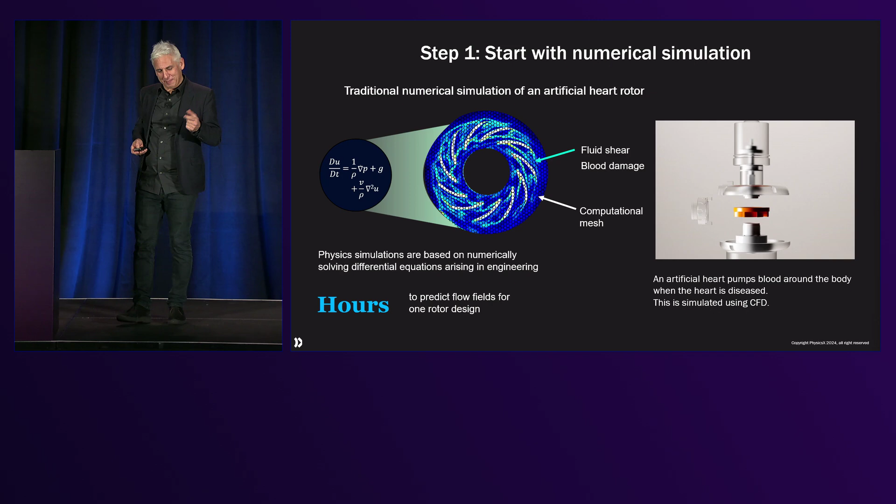So in this pump, there's a rotor. That's really at the heart of the heart pump. And that rotor has to be optimized for just those things I said. So on the left, we're coming back to now the simulation. You can see the result of a fluid dynamics simulation here, the mesh superimposed on that, and one calculates the physics, the flow, the shear, as the simulation progresses.

Now, this is the de facto way, solving problems, predicting the behaviors of designs, products, objects, by solving numerical physics is the de facto way in which leading organizations develop their products, whether it's in aerospace and automotive or even here in medtech. Now, the reason that is it didn't used to be. It used to be physical development.

You would build test cars and you would crash them into a wall to see if the occupants would survive that, crash test dummies. And then you would change the design, would make a new prototype car with new prototype parts and crash it into the wall again. It takes a lot of time and it's expensive. Destroying an expensive prototype car.

So simulation has replaced that. Virtual crash simulation, now every auto manufacturer does that. This is how they develop the product to be faster. It doesn't cost anything except compute to smash the virtual car into the wall. And it's fast, right? So this was a quantum leap in performance in advanced industries to replace physical testing with virtual testing. And you can do that in most contexts, not always, but in most.

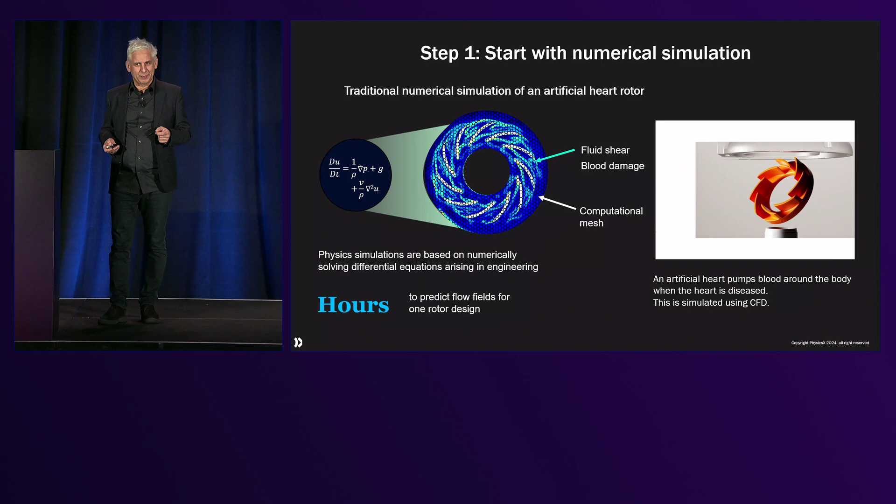And the answer is yes. We can build this, and in fact, to high accuracy. The reason it's high accuracy is because this is labeled data. This is highly accurate data already. All of that simulation data, all of that information on the meshes, all those flow fields, pressure fields, and all of that. These are highly validated simulations. Therefore, the data is labeled, and it's very high quality. So the models we can train are high-quality models.

And the benefit is, though, the deep learning model is much, much faster. That heart pump simulation takes about 1.4 hours. And in some contexts, simulations are over a week per simulation long. So typically hours to days is a normal time to run one simulation. So can we go faster? Well, deep learning models, yes. It's not partial differential equations, it's linear algebra. Everybody knows they run in under a second.

So when you can run the equivalent of a simulation that fast, you have the opportunity to optimize. You can change the design, run the model, inference, predict the physics, re-optimize the geometry, and you can do that very, very fast. And you can do that inexpensively. Simulations have to run on hundreds or thousands of CPUs for a long time. These models inference on a single large GPU like an A100. And even if you need more, you can split the graphs and all of that, but typically a single GPU will allow you to inference.

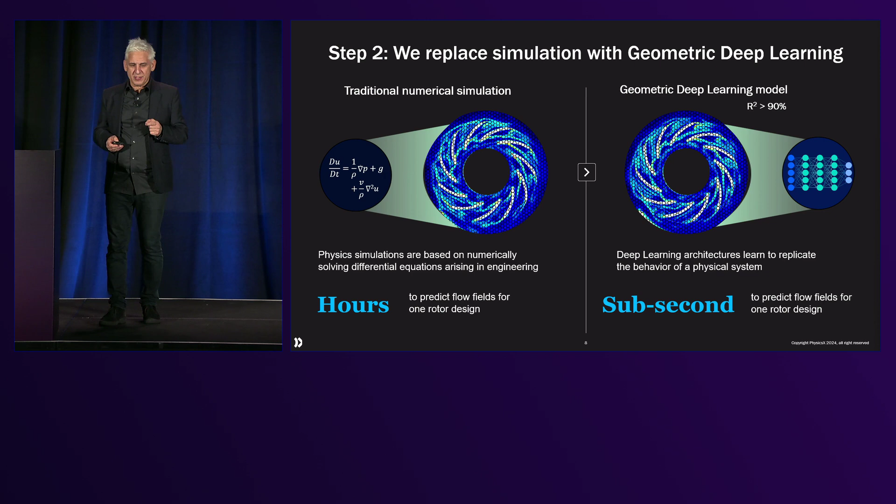So how do you train a large physics model? On the left-hand side of this image, it's a typical legacy process here. You run a CAE simulation. CAE is computer-aided engineering, so that can be CFD, computational fluid dynamics, or FEA, finite element analysis, or electromagnetic simulation, CEM. You run the simulation on the object, on the first geometry of that object, and you get a result.

And then, okay, it's not good enough, so you optimize the geometry. You can do that by hand, or you do it programmatically, and you run this loop. And that generates data until, in the legacy process, you get somewhere that is acceptable. But in this, you might have to run 50 simulations or so to get to your target, because that's all you have time for in the few months that you have to develop this product. But in the process of that, you generate training data.

The training data, the input, again, is the geometry, the mesh, and some of the operating conditions like pressure difference. And the output is the physics, the pressure fields, the scalars, lift, drag, strain.

Okay, great. As I said earlier, we built our own foundation models. They're on our platform. Our models are available. There's a handful of different types of archetypes that are relevant for different contexts. But you can bring your own models to our platform. You can use models from Modulus if you want to, third-party models. Everything plays. You train the model, adjusting hyperparameters and so on until your correlation is acceptable.

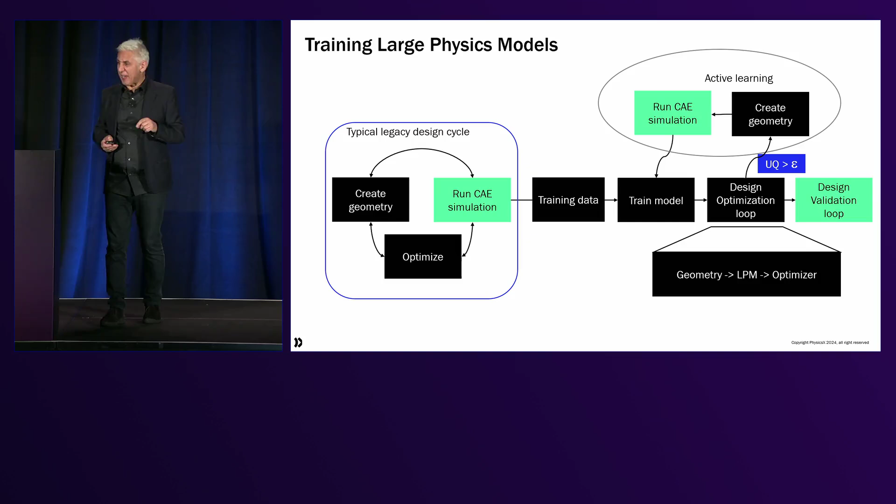Okay. So let's see that in action, what happens when we have a trained model and we run it through geometry creation, model inference, and optimization. So here's that rotor for the heart pump again. You can see we generate the geometry. This runs real time on one A100. Generate the geometry. The physics model evaluates it. An optimizer changes the geometry again based on the result. And each iteration is one of those loops. It's about an iteration a second.

On the left-hand side is delta P, it's pressure. And so as you increase the pressure difference, it just means the pump flows more. We're looking at one parameter here, but it's actually multi-parameter optimization. Blood damage is kept track of. There's additional physics happening here that you're not seeing, like thrust on the bearings and things like that. That is estimated just to make sure we don't exceed any of those thresholds.

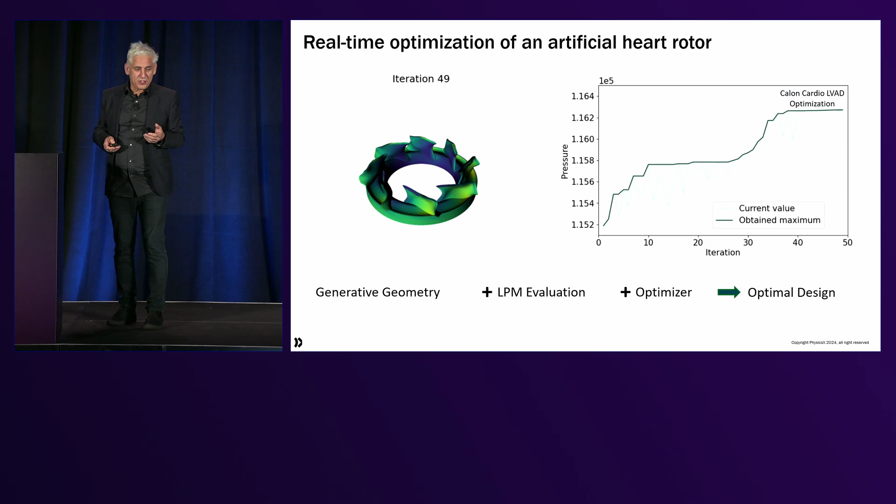So in about the minute that I've been talking, we've made, what does that look like? Maybe a couple percent delta P improvement. Yeah. That's not bad, maybe a little over 1%. So, you keep going like that, you will eventually reach some tangential state, but you will have done 100,000 simulations or optimizations in a day and really extracted the maximum performance out of this pump that is possible within the space that you have available.

So if we put this all together, again, the loop, geometry creation, and let's dive a little bit more into how we generate geometry. Computer-aided engineering, parameterizations, computer-aided design, CAD, is the de facto way, the normal way that designs are done. Engineers specify all the curvatures and the distances between objects and all of that. Takes a long time to do that. You can mesh that part then, and you get a mesh, as you saw earlier, and you can distort this mesh. So that's a capability that we've built of mesh distortion. It's very fast. That takes a fraction of a second to distort the mesh.

There are generative models. Not only us, other people do generative models, topology optimizers, and things like that. That's one way to generate geometry. But then there's a special way, and we'll get to that a little bit later on large geometry models, and I won't say more of that until I get there. As I said, we have deep foundation models that we train, and once they are trained to generalize well, these large physics models then can predict the physics. And then in optimization, there's classes of optimizers that we provide on the platform, Bayesian optimization, gradient descent, genetic algorithms.

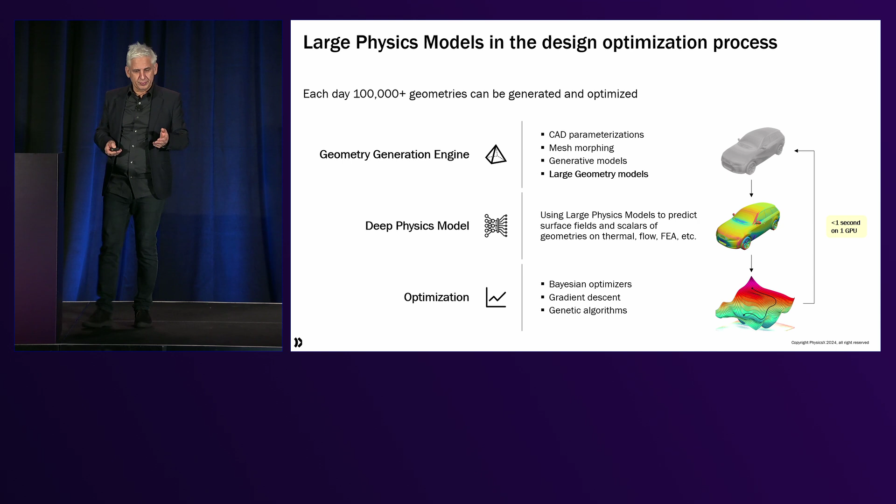So let's talk about the platform a little bit. The PhysicsX platform is founded on a data unification layer. The data that is relevant is simulation data, but also laboratory testing data. I will show you an example of that in a moment. And operational data, so data coming from machines that are operating on the floor of a factory or from objects like helicopters that are flying.

On top of that sit the solutions. And those solutions are really relevant for the sectors that you work in, so aerospace or automotive. It's often around shape optimization. There are solutions around, for example, structural optimization, system optimization, so several simulation tools linked in a chain that you want to optimize. We can do that. We have done that. Our customers are using that. The operations team, I said earlier, factory flow, I'll have an example dive into that.

And even sales engineers are using these tools because they can very quickly predict the performance of, let's say, a hydroturbine or a wind turbine in the field under those local conditions under which they're trying to sell it. And that means they can sell a little bit more energy at lower risk.

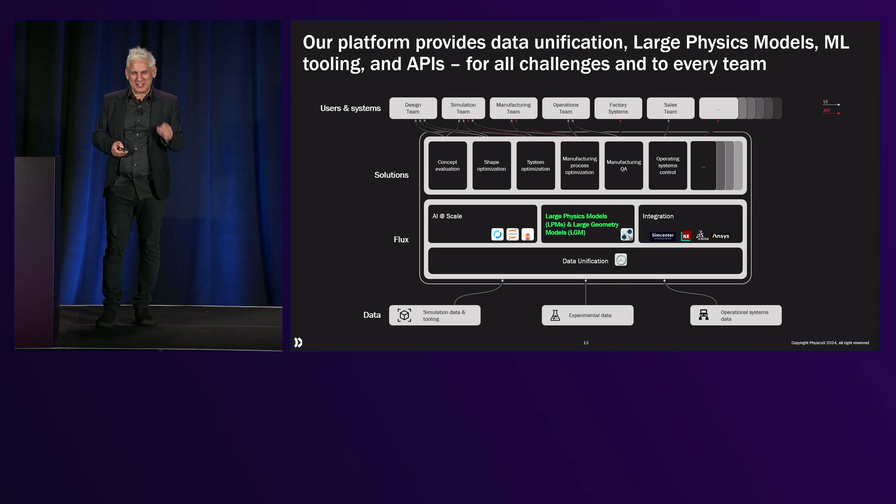So let's now solve something on the platform. We'll demo the platform to you. And let's pick something difficult, because we like difficult, hard challenges. Let's pick a jet engine. So, jet engines are complex, and I don't understand them all. So, they're complex objects. And they're also very complex to simulate. I'm oversimplifying a little bit. I'm just looking at one thing on this jet engine in particular.

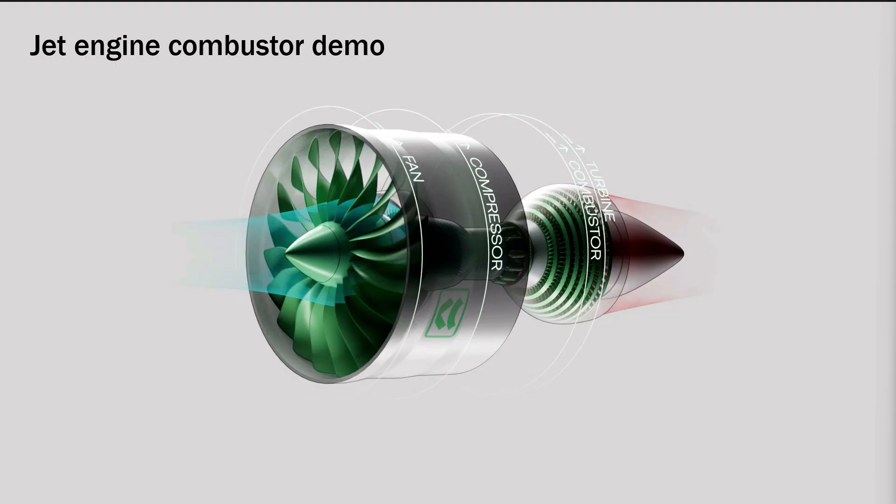So let's dive into this jet engine, literally. The airflow is sucked in by the fan. It's then compressed on the compressor stage. And then these little bottles are the combustors, and they mix fuel and that compressed air and burn it. And then it exits into the turbine stage at the end, and the expanding air causes the turbine to spin and produce the thrust. So we're just going to look now at the combustor.

So it's a canister with holes. At the entrance, you can't see it, it's got mixing blades, stationary blades that mix the fuel and the air, and they've got complex shapes. And the can, what's the shape of the can like? There's a lot to optimize around there, lots of holes in them. So a lot of parameters to optimize.

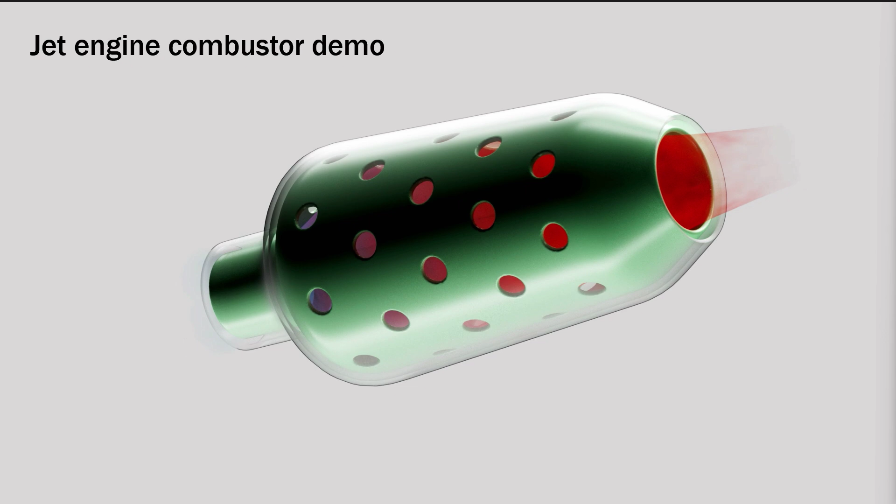And it's multi-physics, right? We've got airflow, we've got thermal physics, we've got chemistry, we're combusting stuff, right? So there's chemical reaction equations that have to be solved. There are material properties that have to be obeyed, constraints, temperature limits, things like that for material properties, for stress and strain and thermal fatigue. So this is complex. How can AI possibly solve this?

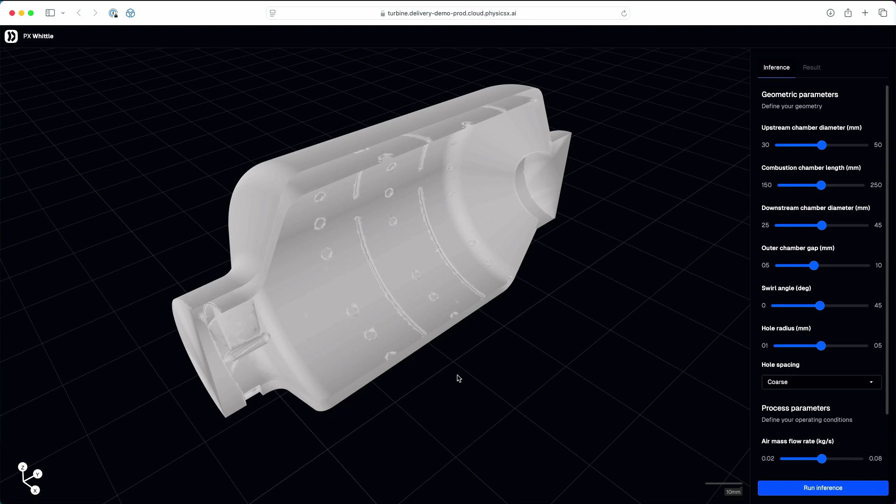Okay, so now we're in the interface of our platform. Here's the starting geometry of that combustor. On the right-hand side are the geometrical parameters you can vary. This is how this has been set up. So there's, I don't know, 8 or 9 of them that can be varied. And let's see how this is done, right? Let's change a couple of these geometries on the right-hand side.

So adjusting, can't see it from here. Adjusting a few, hit run, and there, less than a second, this is the result. Now this is real physics. These are the real performance parameters. There's low efficiency of 0.3, high temperatures everywhere. Clearly not a good design. So let's re-optimize here, just changing, making it a bit longer.

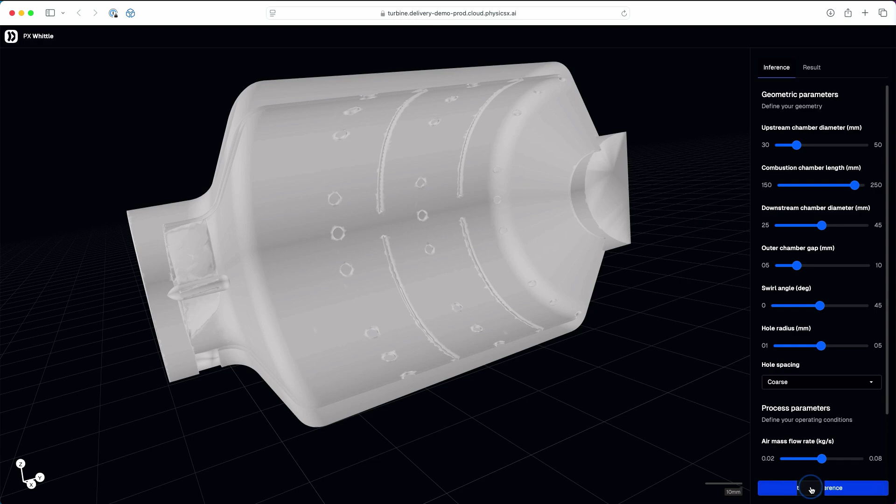Hit inference again. Okay, a little bit better, 0.4, not great. Temperature's a bit more under control on the exit now. Now, I could go through this manually, but that takes a long time. How can we do that programmatically? Can we do this hands-off? Absolutely. Let's have the part optimized by itself.

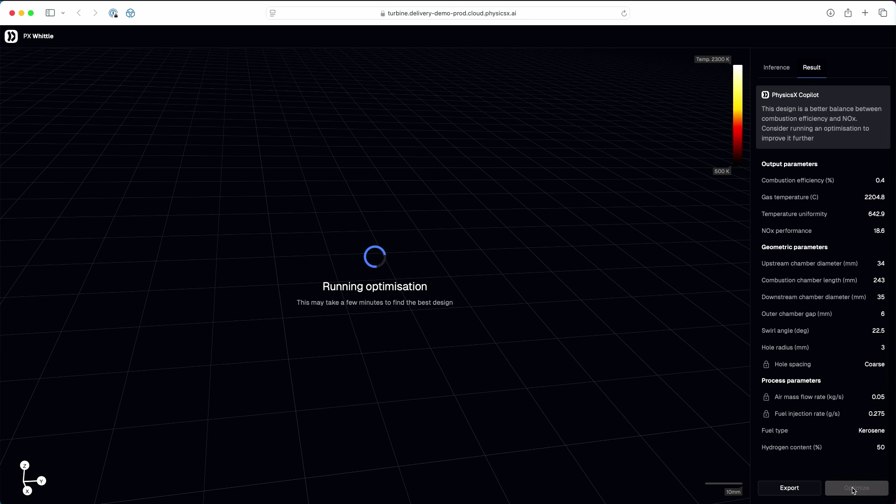So now in the background, this process that I described earlier is running: geometry creation, large physics model inference, optimization, looping this, and while I'm talking, there's only time for, I don't know, a couple dozen or so runs. So these are the results. On the bottom axis, you have efficiency, so essentially power produced. On the vertical axis, you have emissions, and lower is better.

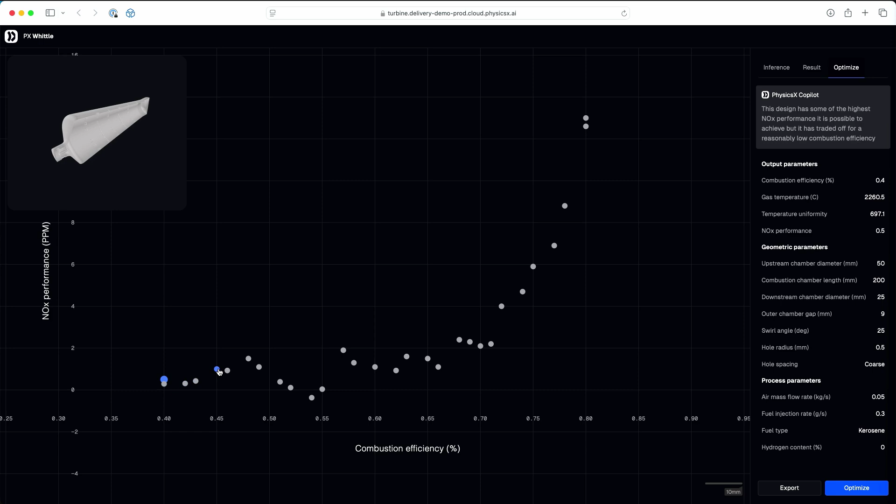So on the left-hand side here is a very low emission point. Each point is a geometry. It's a full solution. You can see the solution there in the top left corner. And let's pick one in the knee of the curve that makes sense. It's still low emissions, but has high efficiency. And if I look at the efficiency number, it's 0.7.

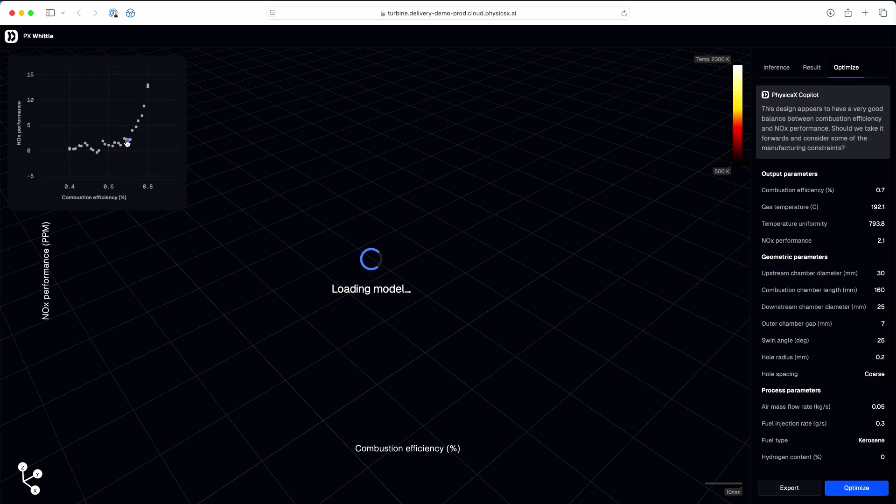Let's load that model. You can see it looks very different. Much longer, skinnier. Hole locations are different. You can see the turbulators of the blades, whatever those have shown up now to be. But you can see the whole flow field is much, much better. The temperatures are very contained. Everything is burned, right? There's no more burning near the exit, so efficiency is high.

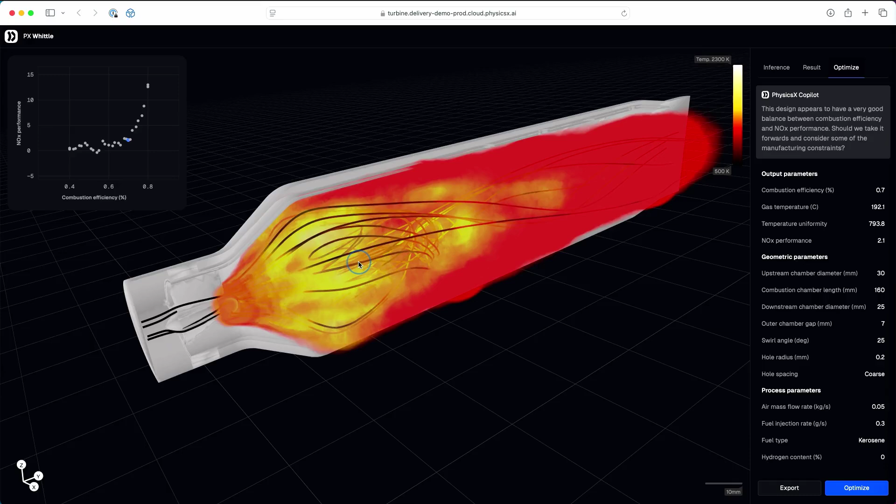So in a matter of a couple minutes or so, maybe a minute, we got to somewhere that with the legacy simulation would have taken us weeks. And we can go more and see if this Pareto front, this curve, even pushes us into yet a better direction. So what this means is that we can take the time-consuming process of numerical simulation, compress it greatly, and optimize designs much better.

Now, we talked about this optimization in the context of product development. But there are other contexts in the product lifecycle that are relevant that we'll get into. So in product development, just some other examples. We have worked in things like eVTOL, Formula One cars, our background, passenger car wheels for flow and strength, wind turbines, and even nuclear fusion, which is really hard physics, but the models can learn that.

I'm going to walk you through one example, but I've got to keep an eye on time a little bit. So this is now structural simulation. There's a tire for racing cars. You're not actually seeing a real tire here. When a racing car goes around the corner, the tire deforms because it's very sticky, lots of load, the sidewall changes. And when that happens, the airflow changes. So when you want to do a CFD simulation of that car, you need to know the shape of the tire in that cornering condition.

In a corner, you want to have lots of downforce, and on the straight, low drag. Okay, so you need to know the shape of the tire. Well, it takes about 14 hours to run one of those shape simulations. Just one set of loads at the contact patch, and you get the new shape back 14 hours later. You can't iterate, right? And there are dozens and dozens of these conditions which you have to reproduce around the racetrack. So can we go faster?

Yes, we trained a model on only 35 of these finite element results. And you can see the results of the model here. Correlation of 98%. By comparison, a GP, which we trained earnestly to benchmark against, had a correlation of 59%. A shape error of no more than 1.5 millimeters across the whole shape of the tire compared to the ground truth for all of those different loading conditions. So highly accurate. A GP had 9.5 millimeters. So geometric deep learning really accelerates the ability to have accurate models.

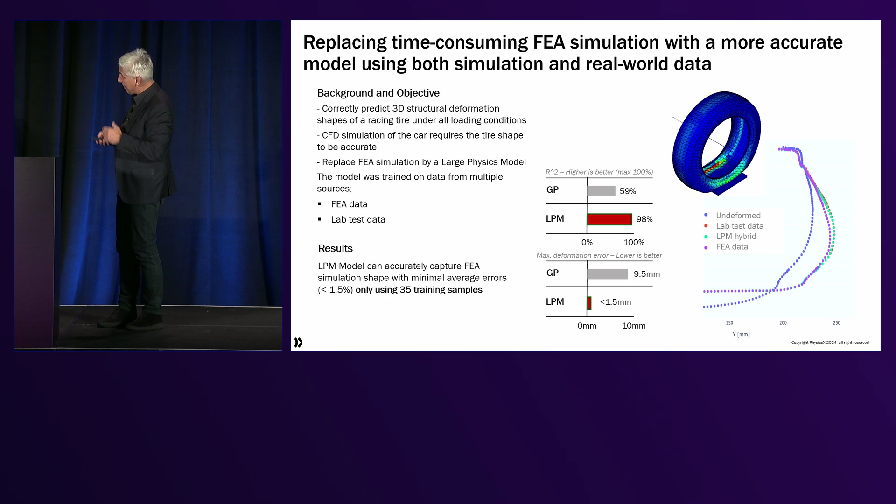But even more interestingly, there was lab test data. The shape of the sidewall was measured in a lab test where the tire was exposed to the same loads. And we trained on that as well. You can see that in the right-hand graph here. And this is not blown up. This is how much these tires distort. The blue line is the undistorted shape of the tire when it's not loaded.

Oh, I should say one thing about these tires. These are complex, right? Number one, you have rubber, viscoelastic material, nasty material. Then you have Kevlar belts in these tires. Then you've got centrifugal forces acting on them. And you have a contact patch, which you can see is flat here once it's loaded. And you have inflation pressures and temperature. So the model has to know about all of these things to give you the right answer.

So you can see the flat contact patch once it's loaded, and you can see the sidewall distortion here. The colors are difficult to see, but basically the green line here is the model prediction, and the lab test data is the red line that is literally right underneath the green line. The FE data is just a little bit to the inside, purple there.

And so you can see retraining it with the lab test data actually gave us that last bit of accuracy that we needed. And that is fantastic because these models, they train on data. You represent the data on the same mesh. The model doesn't know whether it's numerical or laboratory data.

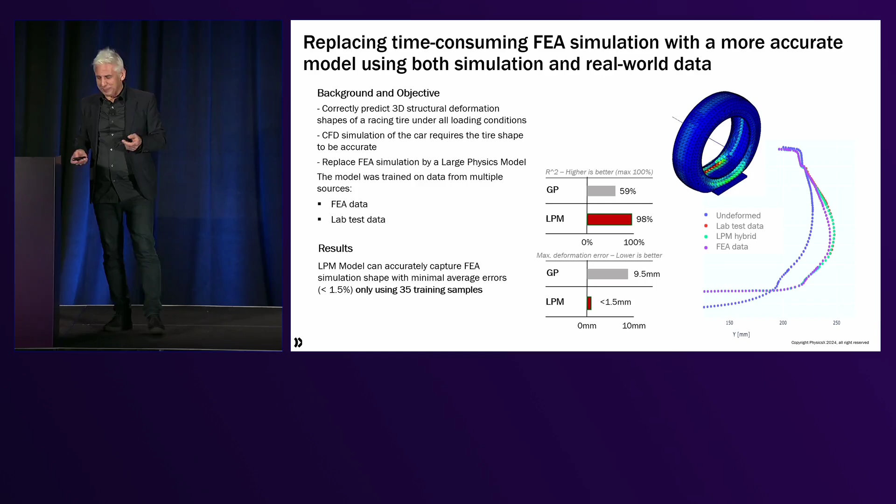I'm going to skip a little bit. I'm just going to say on this one, this is a structural optimization of a heat exchanger. A very complex heat exchanger, conformal heat exchanger, sits around an aircraft, commercial aircraft. And there it needed a complete virtual prove-out. So multi-physics, this was flow, temperature, both external air, oil, and burst simulations, burst validation, and even vibration optimization.

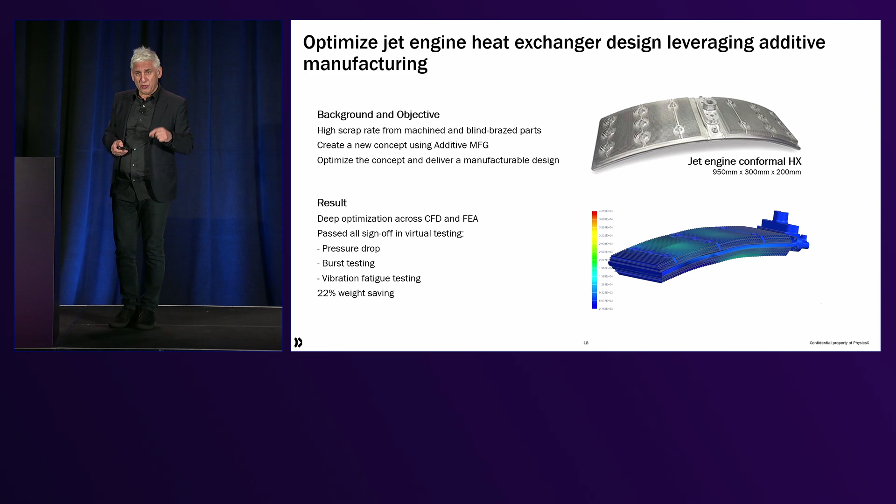So the design was taken from a standard manufacturing process of machined and brazed part to additive, where we had a lot of geometric design freedom and could really run our geometry models very, very fast. Let me go a bit quicker here. Manufacturing. This tech is very relevant in manufacturing. For example, we optimize casting. Here's an example from a jet engine QA process.

You saw earlier in the compressor stage of the jet engine, you have these blades. They have to conform to the drawing. They have to be balanced around the compressor ring. They have to produce the thrust. So each blade is dimensionally scanned, and when it falls outside the range of dimensions, the error that is allowed within the drawing, it's scrapped. But you don't really care about whether it conforms to the drawing. What you care about is whether it makes the thrust that it's supposed to make, right?

So we trained a model with our customer on this data, and the scan is done, and within a second, the operator, the technician, knows whether it conforms to a thrust requirement or not. Does it fall within that band of not too little and not too much thrust? And then if it does fall outside of the band, it's scrapped. We reduced the scrap rate by 70% doing that. They were scrapping far too many parts.

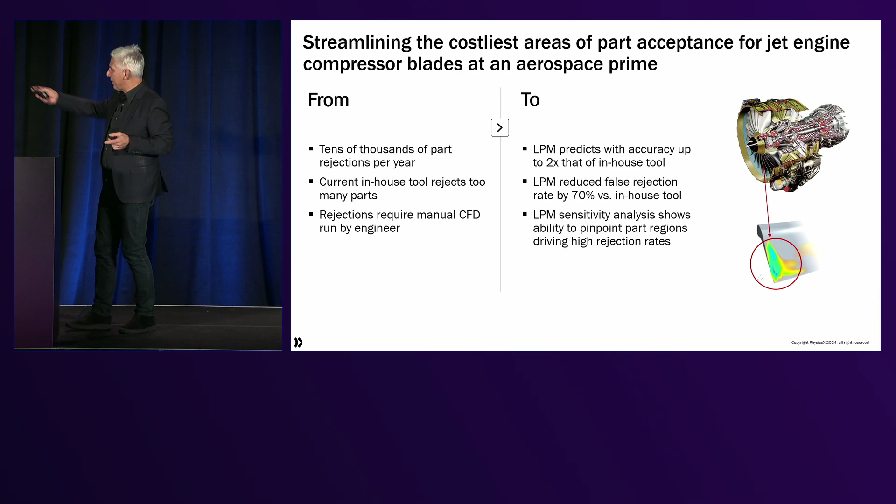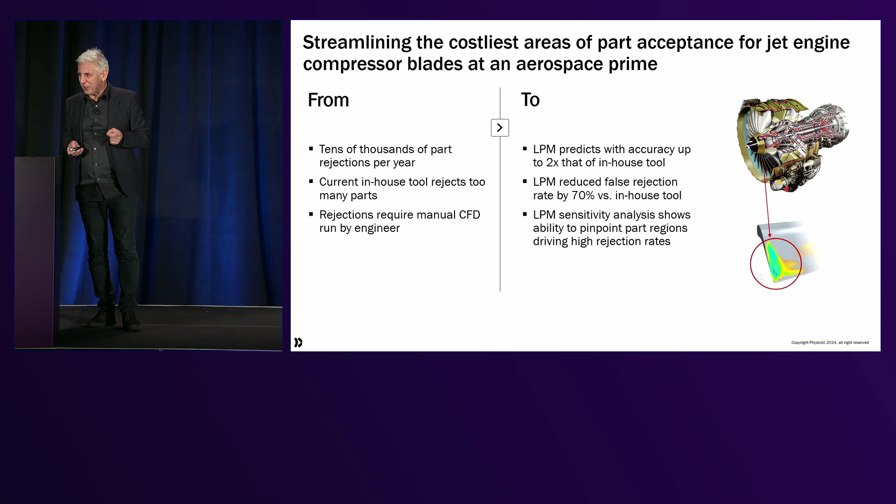Not only that, the models are differentiable, so you can find out the highest sensitivity area for performance. That's where the manufacturing process has to be accurate. And in areas where the performance isn't affected by a dimensional variable, you can relax the manufacturing process. So that's also really valuable information to feed back in.

Operational metrics. Here in particular, this is aluminum smelting, huge pools, the size of swimming pools, full of molten aluminum. And you want to have the highest quality concentration of alumina. So it's very important to keep the uniformity and the temperature for the aluminum to form in these pools very uniform. There's feeder rates that feed in the alumina. And you want to use also the minimum amount of temperature to create that high quality aluminate.

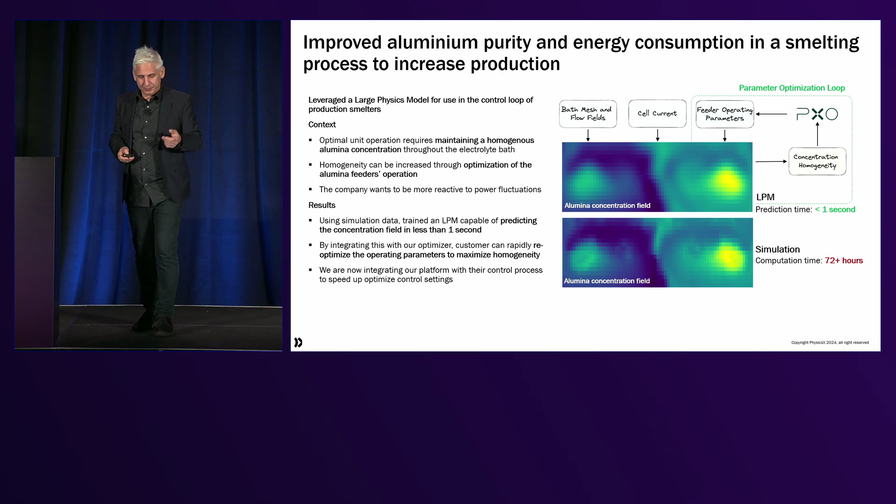Now, this is being used now. This is being integrated into the control systems of this materials manufacturer in order to operate on the production floor. So again, in an operational context, large physics models can be plant representations that can integrate into control systems real time. Not all control systems, if the control system has a 1,000 hertz update rate, no, that's too fast. But if the update rate is tens of hertz or something like that, that's possible. And you design the physics model to operate that quickly.

This is quite cool. This is a virtual sensor. The application here is virtual sensor. So a helicopter OEM, who we've been working with for about 2 years, is using our technology across a number of applications. In this particular case, these blades flap. They're free to move this way as they're loaded and unloaded. And when you develop a helicopter, you want to know what that flap angle is.

And that's a very expensive kit to put on the helicopter. They don't have many. And then you have to perform all of these special flight tests to all the operational conditions and all of that. Adds up to a lot of time and money. We trained on some of this data, and then we replaced the physical sensor with a virtual sensor. And the virtual sensor was only driven by the flight conditions, so rate of lift, angle of attack, all this sort of thing, and pilot inputs. Nothing else. So it didn't require any other sensors that weren't already on the normal helicopter as it is.

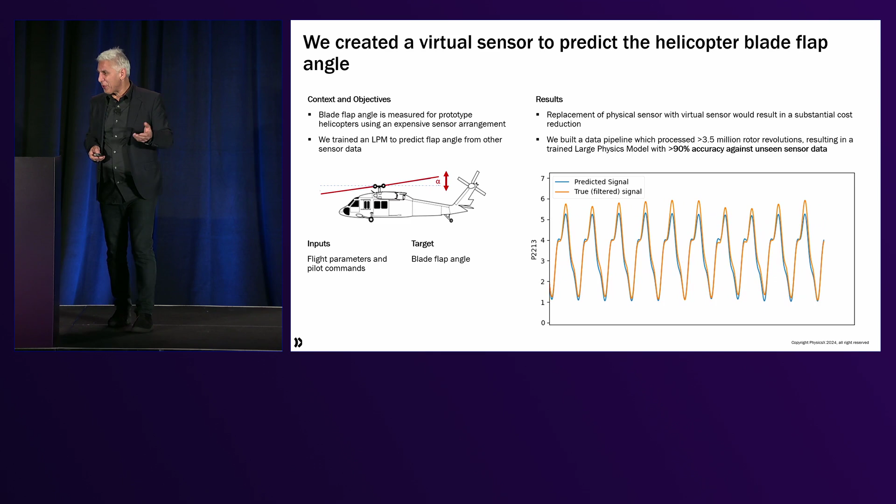And it predicted the blade flap angle as a function of time. And you can see that here. So there's the predicted signal in blue and the true filtered signal from the sensor. And it's not perfect, but it's pretty close. In terms of understanding the fatigues and the cycles that this goes through, it's a great virtual sensor in lieu of something that's very expensive and time-consuming.

I think the most interesting stage is innovate. So this is where you have your concepts for your new designs, your new ideas. How can machine learning and deep learning possibly help in that? Right? We're training on existing data, existing simulation models. Well, let's get into this.

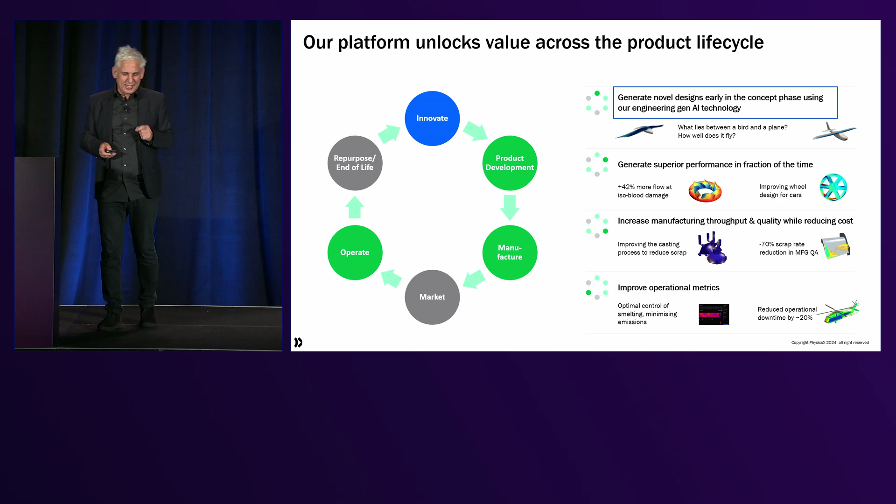I think it's really exciting, and we want to come back to another element of our foundational tech, which is large geometry models. So what we do is we replace computer-aided design engineering with large geometry models. And the way we have done that is we've trained a large geometry model. And this is the largest geometry model for engineering. We trained on 25 million geometries, everything we could find, everything that we could generate. And we learned what is foundationally true about geometry from that training.

This model was trained on AWS Elastic Compute as part of our GenAI award and consortium. We learned encodings of these geometries into a vector. So take a big mesh, millions of cells, and you can encode it into a vector of a few hundred numbers, typically. That's incredible. That's an incredible amount of data compression. And it takes a deep learning model to learn this encoding to be maximally accurate within this dimensionality reduction.

The vector is called a latent vector, and the space of vectors is called a latent space. And in this latent space, every point is a geometry. We just collapsed the vector here into a plane so it can be seen. So each point is a particular type of geometry. And you can think of the latent space as a feature space of sorts. It's a space that's learned. It's not humanly imposed. So it's a bit hard to describe it, but we think of it as a feature space.

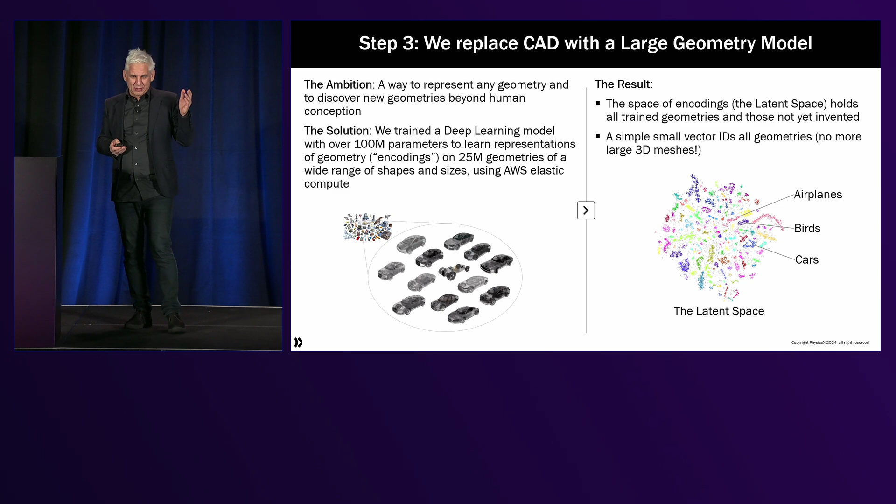Now, let's see what we can do with this latent vector. This large geometry model can now encode any geometry into a latent vector. If we take a geometry, a mesh, let's say, and we encode it, and it represents a point in the latent space, we can then decode it again. We can either decode it into another type of geometry or the same geometry, and that's actually how we train to make sure that these meshes, after encoding and decoding, truly overlap, or into physics. And that's where it gets interesting.

Because now we have a latent vector of a few hundred numbers that learns a lot faster, right? You can inference a lot more accurately, train it more accurately, back to the physics, which are fields, pressure fields, volumetric fields, scalars.

Now, what's really cool is that in this latent space, the space of geometries, you see the geometries that we've used in the training, right? So you know what's in the space where you trained. But what's in the white space? There's no data in the white spots. What does that look like? So, there's a geometry here on the left of an aircraft. What about the geometry of a bird? Where's that? And what's between the shape of a bird and an aircraft, and how does that fly?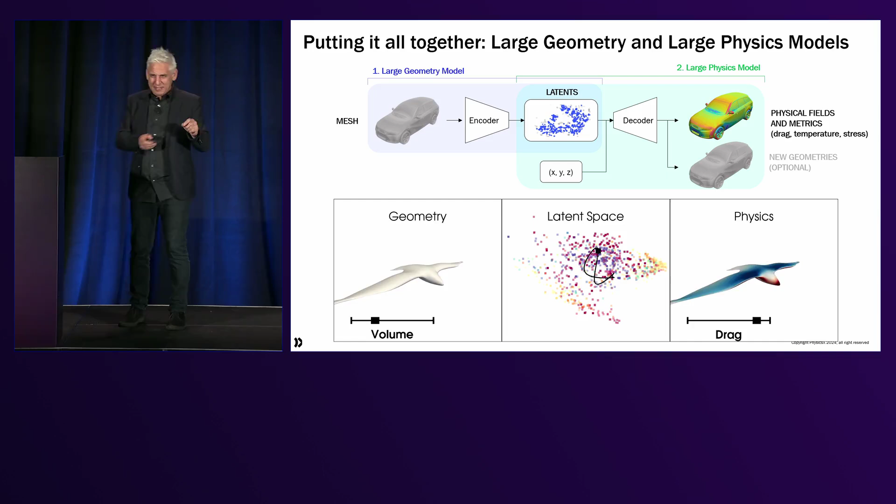We see the physics on the right-hand side, the pressure distribution and the drag. And I want to just emphasize, this is real. This isn't a Figma thing. This is real physics, validated, run, accurate. And this really sums up a new world of engineering, doesn't it? I think large geometry models and large physics models have arrived. They're real, and they're going to change the way engineering is practiced. And that's what our customers are doing now.

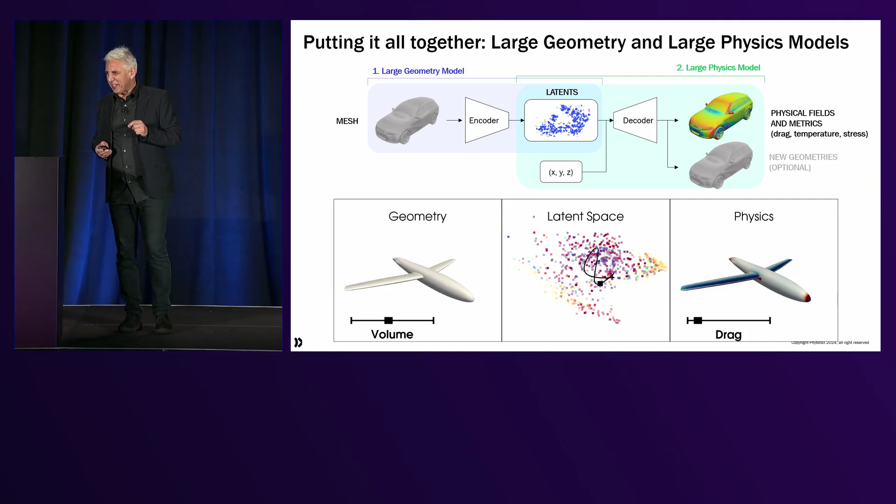Now, at the beginning of the talk, I promised you that you could design an aircraft. So let's do that. Let's finish with that. Our expert simulation engineers used AWS Elastic Compute and Siemens CFD and FEA software to generate a huge data set of physics. Tens of thousands of geometries in our latent space were evaluated for the physics, and we trained a large physics model on that. So today, we're unveiling the result, and we call it Ai.rplane, or Airplane. Airplane is the world's first large geometry and large physics model for flight.

It's one example, though, of how this type of process will transform engineering. So let's dive into Airplane. So what you're seeing here is the latent map. Again, the latent space. I have to click run so it runs. And some of the geometries here on that latent space.

And right now we're looking at lift versus drag. So light blue means high performance. There's also stability that we're looking at. So aircraft stability, there's cargo volume. Okay, so now we can set some sliders on the left-hand side here to sort of narrow up where we want to be, maximum wingspan, so it fits in your garage or whatever.

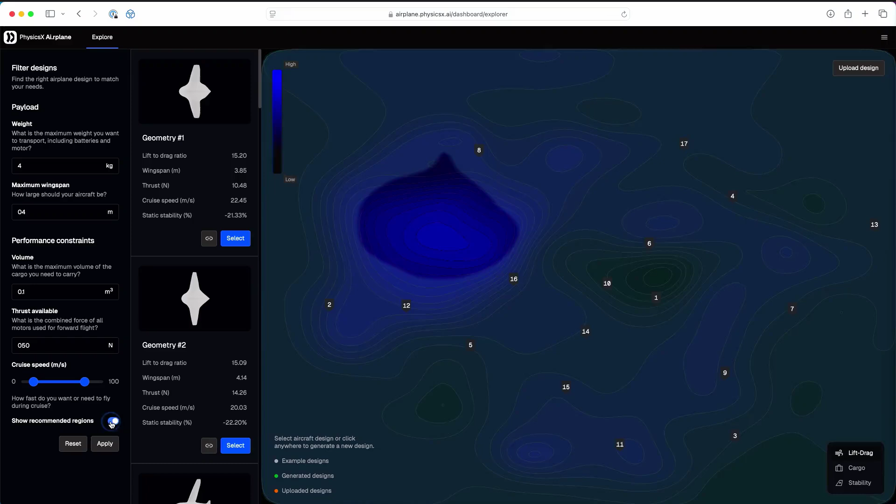The power of the engines, the thrust, some other parameters, how much weight it needs to carry and whatnot. Let's regenerate, and there's the latent space. Here are all the geometries that fit those requirements we've just set, and we can explore them. So there's the first one, kind of looks like a bird, sort of. And there's another one, and that looks like a glider. Has different dimensions, obviously. And there's one here, that's maybe like a flying wing.

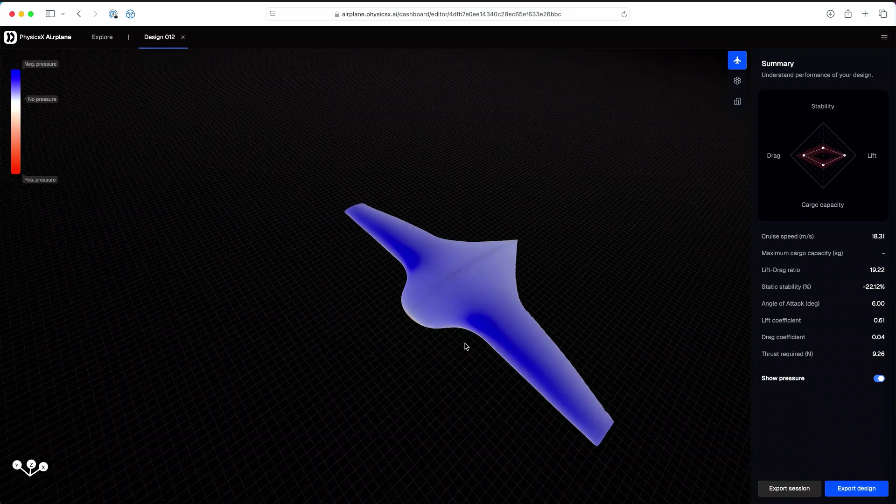We could also click in the white spaces, and there would be a new geometry generated. But let's pick one of the ones that we just looked at. I think that's the first one. And there's the physics for it. There are the physics fields instantaneously. Well, what's the structure look like, right? We've seen lift over drag. We've seen the pressure distribution right now. What's the optimal internal structure look like?

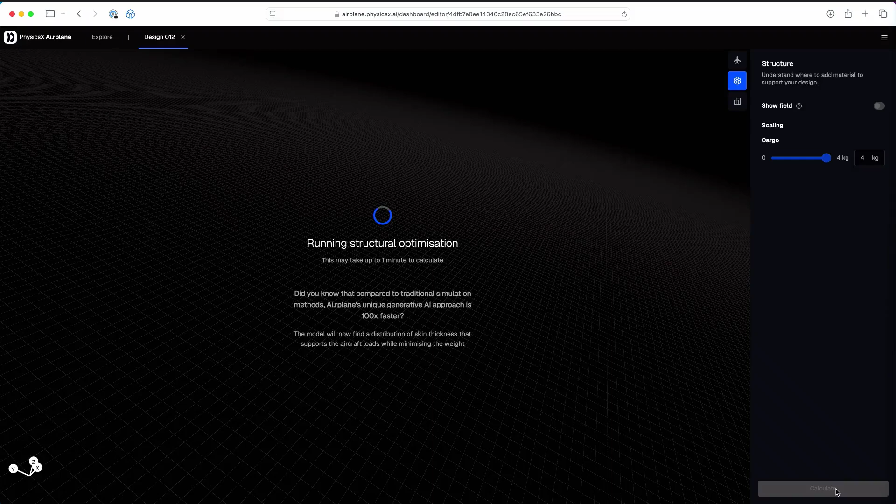Now we're optimizing the thickness of the wings and the fuselage to support the load. So first, we're doing an evaluation of the stresses. So when this is done, we see a stress distribution. And then at the same time, it runs that loop of geometry, thickness, large physics model for finite element analysis, optimization. Okay, so this is now the stress distribution that we see.

And usually you would have high stresses here between the wing and the fuselage, and this doesn't. And the reason it doesn't is because it's increased the thickness of the wing. We're looking at thickness now in that area. So it's mitigated it to the maximum level of stress that's permissible for that material.

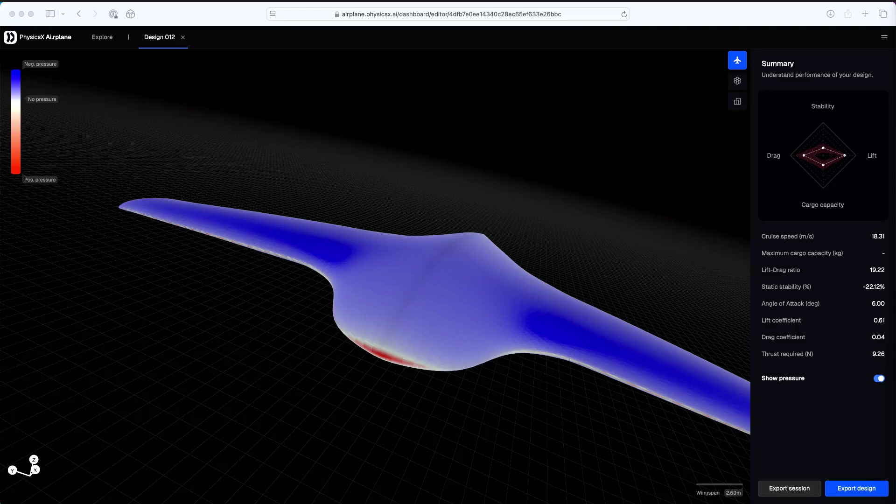Now, you can go and export the shape, and you can go 3D print it, and we've done that and launched them off little launchers and flown them, and that good old fun, and made sure they were stable and learned a lot from that. But what's really cool is you can do this yourself. So here at reInvent, we're releasing Airplane for public use. Anybody can go use it. And we would love for you to do that and offer us that feedback. Really looking forward to that.

It's basic right now, right? You've seen what it does. There's a bit more as you play with it. But over time, we're going to increase the content of that to make this more and more realistic. So we're going to add internal structure. We're going to add cargo protection and cargo positioning and cargo support. We're going to add selections of powertrains that you can download, so real powertrains, commercially available powertrains.

We're going to add control surfaces, flaps, and the control mechanisms for them, the autopilots, to do that. So that will take time, but please keep coming back to this and keep checking back for updates. The upshot from this is that AI-accelerated engineering is real. We have enough proof points, something over 60 proof points in advanced industries where this is working and delivering value in design, in manufacturing, and operations.

So we are delivering this to our customers, and we can do a lot more of that across advanced industries. Now, the real question is not if advanced industries will adopt and transform that. The question is how fast. Those of us who lived the digital revolution from physical to numerical simulation know this is a long transformation, but it happens because of the value and speed it delivers. Exactly the same thing here. The value and the speed that it delivers is absolutely worth it.

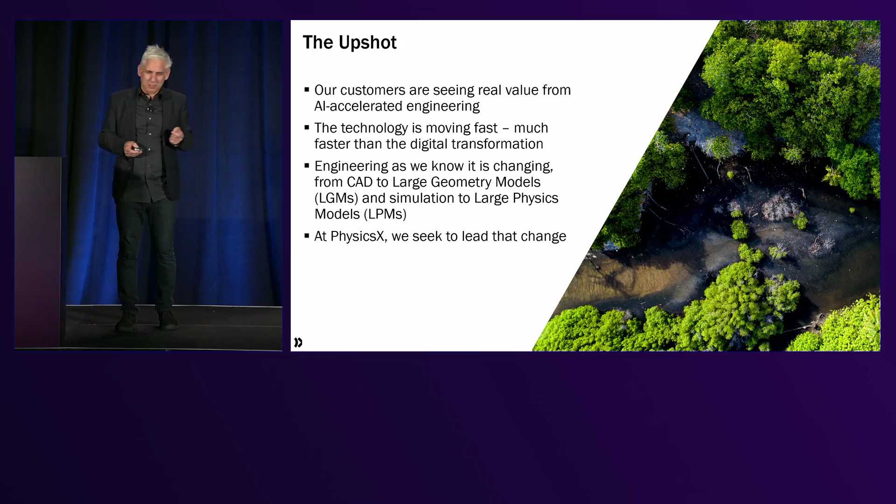But I don't think this will take decades. This will take a number of years, because the pace of AI development and value creation is immense. So we firmly believe, and our mission is, to change engineering the way it is practiced, and we believe this will happen, and will happen quickly. And engineers and their organizations will have the superpower of AI at their fingertips in the near future. And in fact, some already do.